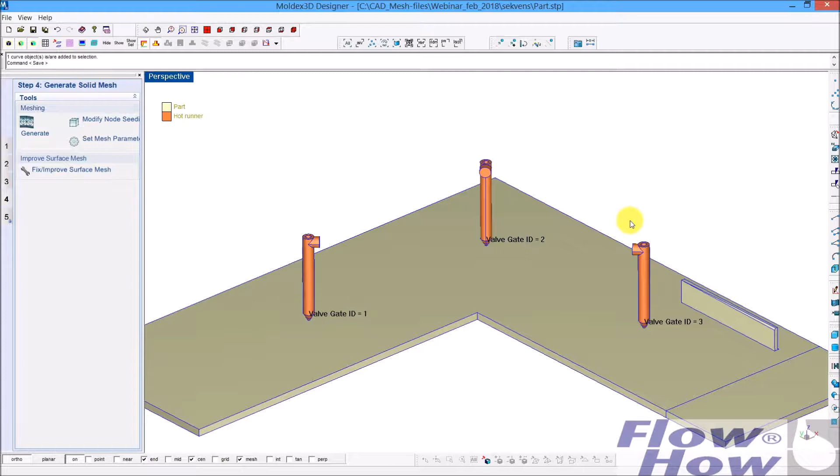In this video I want to show you some of the new features in release 15, and in this case it's about the mixed runner system, and it's a small feature about meshing or repairing surface mesh in boundary layer meshing. It's Moldex release 15. Those new features are introduced.

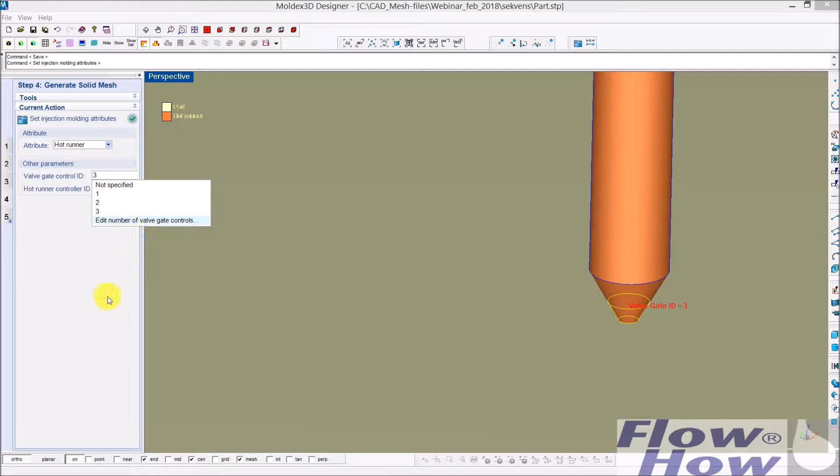If we have a part like this prepared for sequential filling, you can see the valve gates, different valve gates defined. It's a polysurface here, and in the valve gate I have made three different gate numbers, so it's possible to control each one gate at a time.

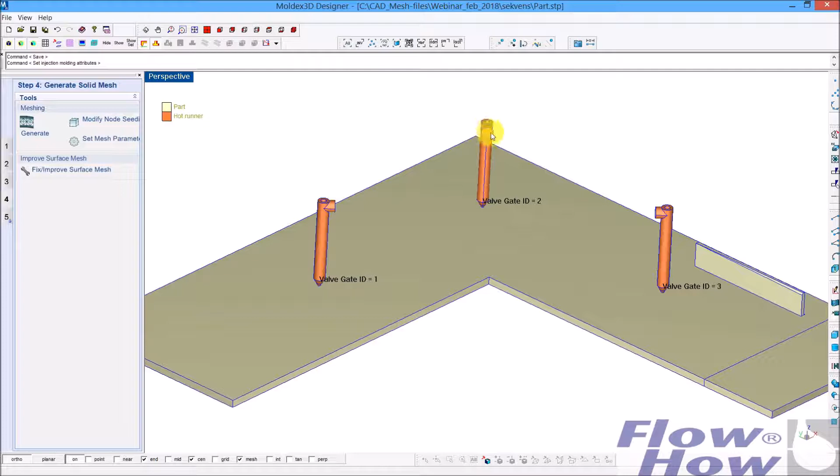I've imported the polysurface, and then I could do the connection between those. I could do it, of course, with step format, but you get less elements and you get better mesh resolution by having a line meshing. So I will import some curves for the runner.

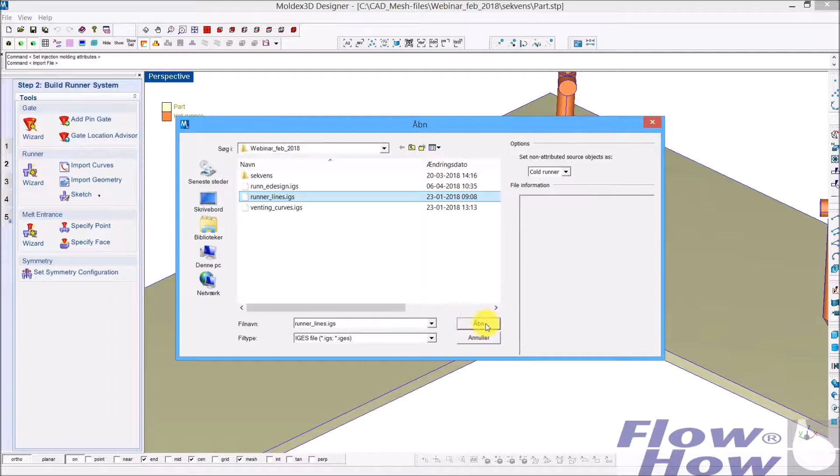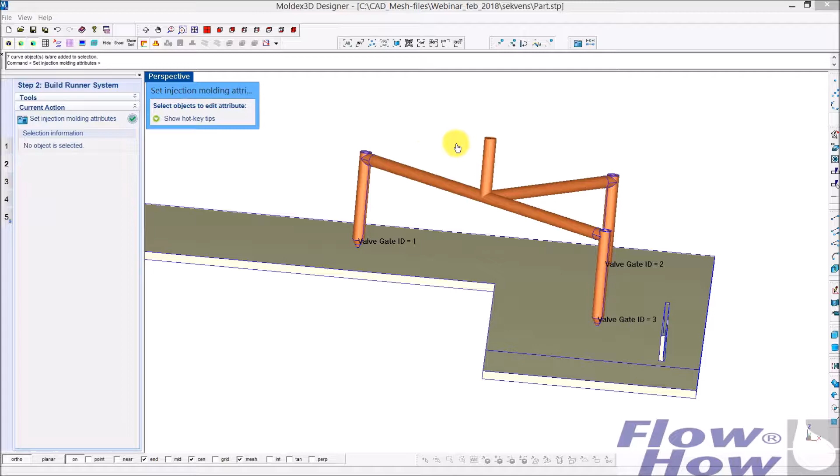Change it for hot runner, and then I have the possibility to change the size of the runner. 6. The important thing is that the line here is the same size as this one.

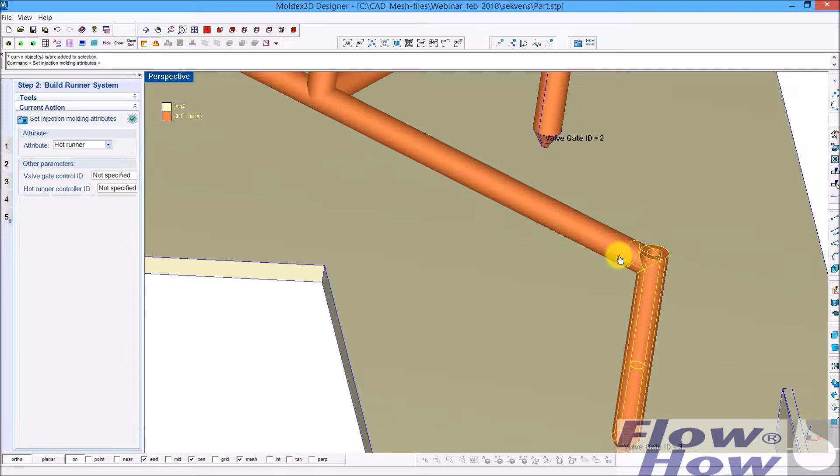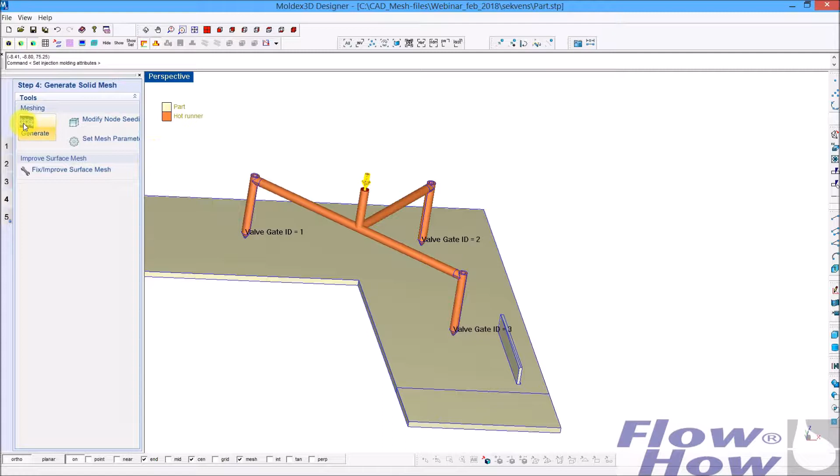So in the connection between the polysurface and the line, you have to have some surface section that is supported by line meshing in Moldex. I need a point, and then I can go to meshing. I don't need a runner system, and I've done the node seeding already. I'll mesh it.

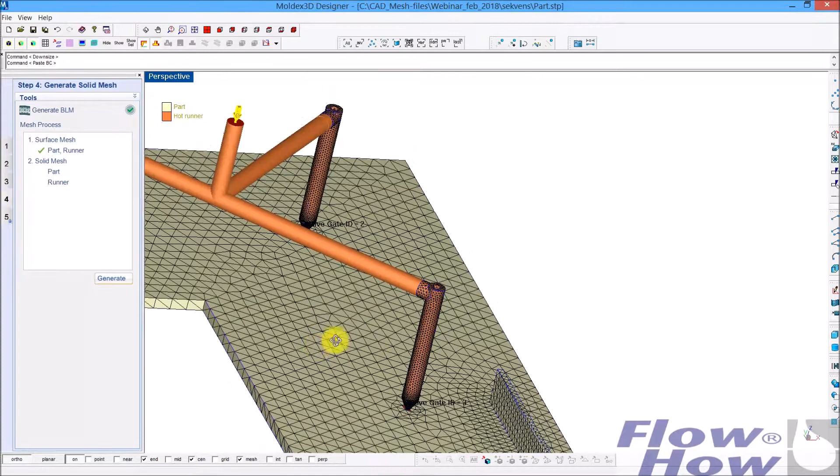And now it meshed all the things that were defined by polysurfaces, and lines go directly from lines to solid meshing. So I'll just generate the rest. Now it creates the runner mesh here. In the polysurface runner, it creates the line meshing, and then it combines or optimizes the connection between the gate and the parts.

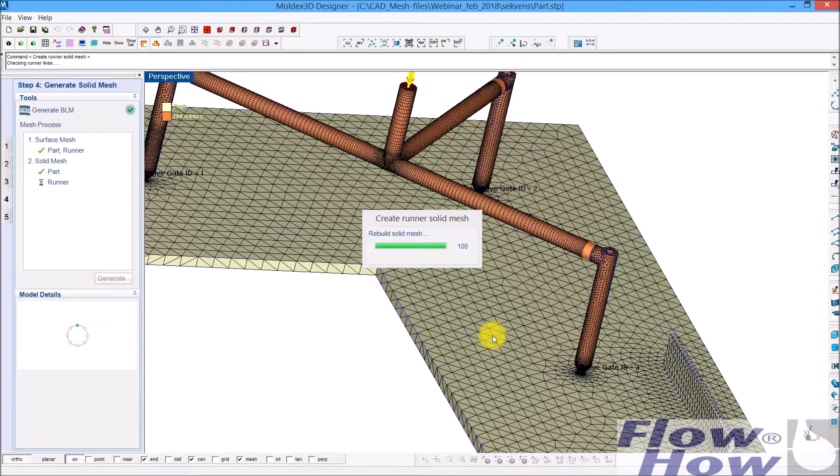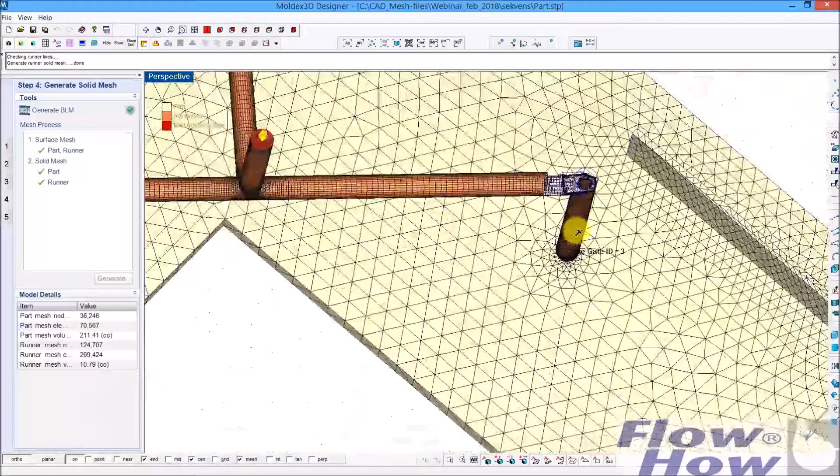Now we got a full mesh, solid mesh, and maybe I should rotate it so it's easy to see. Then I can use my chisel tool to cut in and look how the mesh looks. We have a very structured mesh in the runner, combined with mesh matching over to the runner meshing by a polysurface. That's it about the combination between runners in polysurfaces and lines.

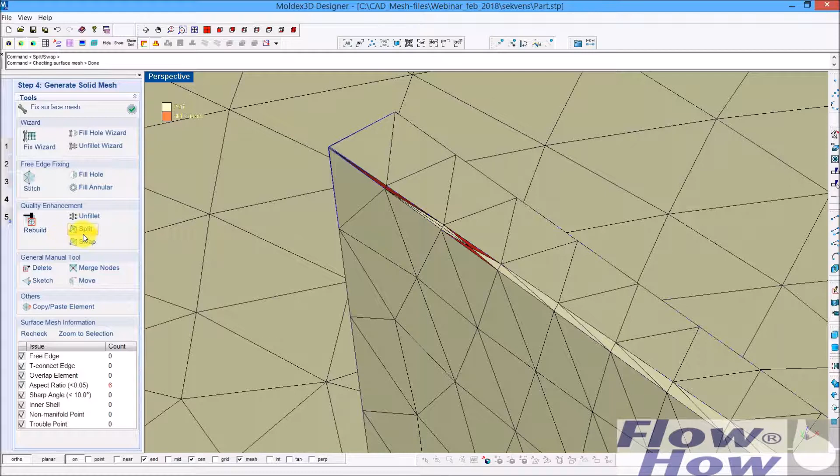On the same part, I have now made some elements that have a bad aspect ratio and have to be repaired before solid meshing is possible. I've done it just with a split edge to create the bad elements. It didn't create that from the start.

One way to do that in release 14 and before is going in and, oops, not fill. You have to delete some elements, close the hole, and then you have a separate mesh, so you could use the unfillet.

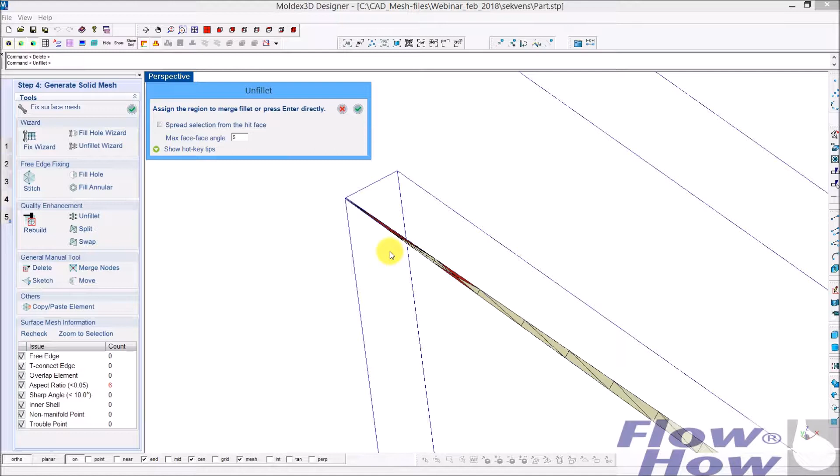But now there is a new feature under unfillet, where you can unfillet single elements in a bigger mesh. So pick the mesh, say yes, and then it asks which elements you want to unfillet. If you just hit enter, it unfillets the whole mesh, but you can pick elements out and say, okay, I want to get rid of this, collapse those elements, and then it repairs.

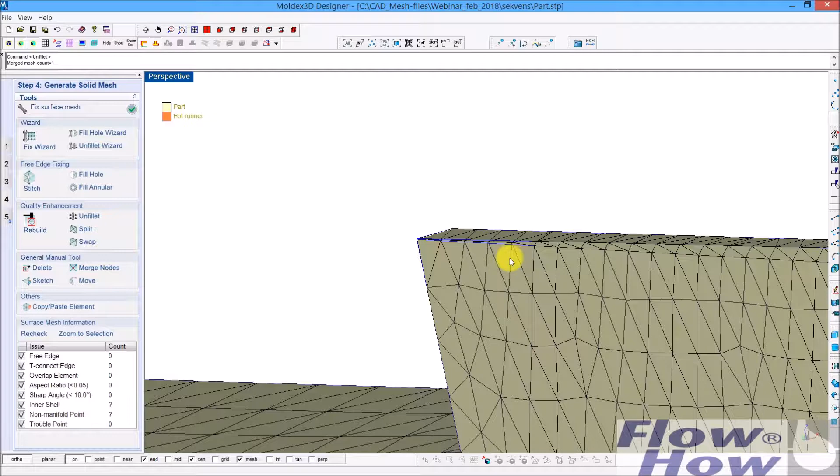Very easy. So it's a good repairing tool for repairing especially bad aspect ratio mesh elements in a bigger mesh. Okay, that's the two features I want to show.